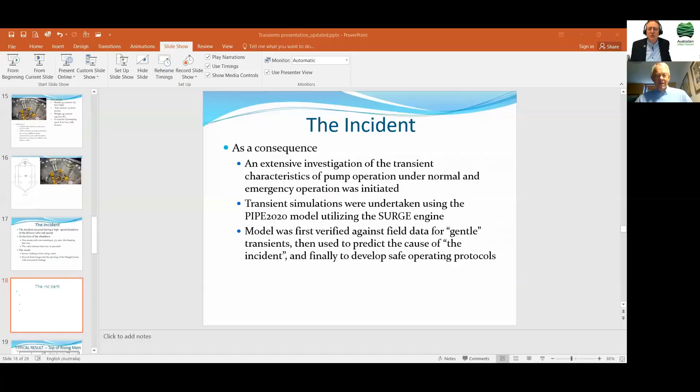All yours. Okay, are your pumps about to fail? Now, my own interest in this topic goes back perhaps 25 or nearly 30 years. I got involved in a couple of pump stations that had been built. Then during operation, they showed some rather unfortunate tendencies with large bangs and occasional bit of leakage and so on. There was not a lot known at the time about what was causing this, so I had a look at it, and that's why I started, and it's continued to this day.

I do spend quite a lot of my time working with supply networks, sewer networks, pumps, valves, and so on, and the effect of changes in the network. We'll see what I mean by that a little later on, what that can do: the pressure waves running around through the system.

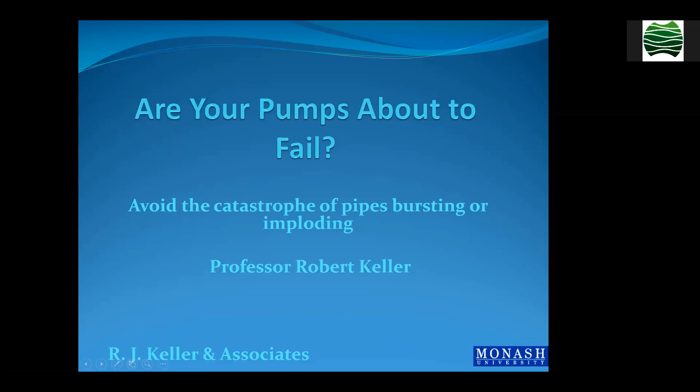Pressure waves, transient phenomena in pipelines, we often refer to this as water hammer. Water hammer is something that we perhaps have all experienced without knowing it. The solenoid valves in our washing machines and dishwashers, for example, are designed to operate very, very rapidly. Occasionally, a solenoid valve will close and you'll hear a bang in the wall. That's water hammer, that's a pressure wave which is bouncing around in the pipe, consequent to the closure of the valve. If you're really unlucky, you'll see a water stain in the wall. The pipe behind it has burst, and that can be a major issue.

We normally think of water hammer as being associated with transient, very high pressures, and these can range from small scale. The picture on your screen now is an HDPE pipe, about 400 millimeter diameter, where a pressure wave simply caused a leak at a joint in the pipe.

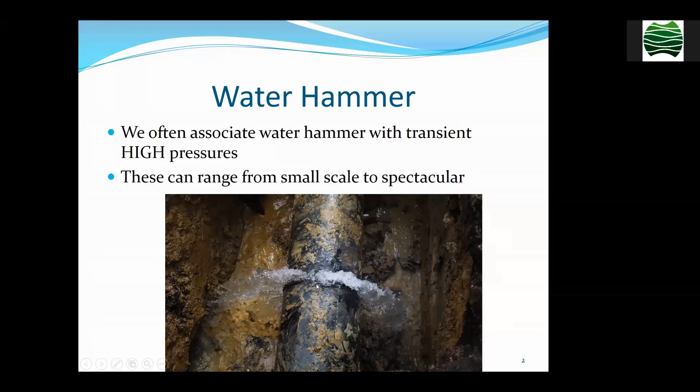Or they can be large and spectacular. You can see a burst water main there, with the consequent water spout from the high pressure behind it once the initial very high range has gone through. The other picture is of a 700 millimeter cast iron pipe, which was totally torn apart by a pressure wave going through it, partly due to the condition of the pipe, which, as you can see, is not very good.

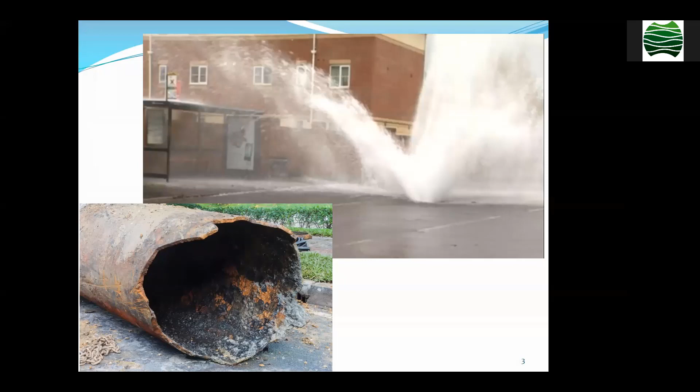But what's often forgotten or not realised is that transient low pressures can be equally as catastrophic. What we're looking at here are a couple of irrigation pipelines, often designed and constructed using non-pressurized pipe on the assumption that, lying on or near the surface, the static pressures they need to withstand are quite low. But of course the operation of a valve can drop that pressure very rapidly, and here you see a couple of cases of irrigation pipes that have been imploded, split through implosion.

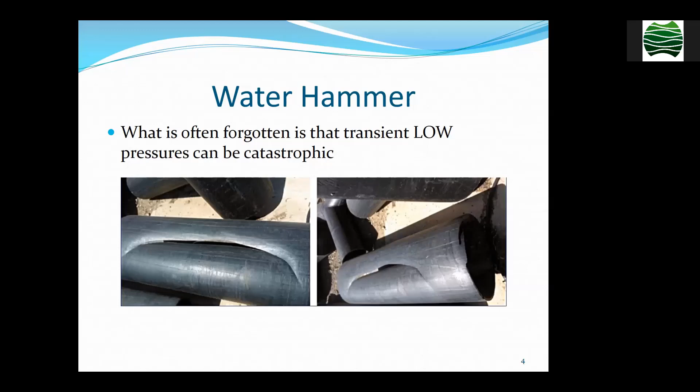So what causes water hammer? Water hammer occurs in a closed conduit when it's flowing full, and it occurs when there's either a reduction or an increase in the flow, with a consequent reduction or increase in the velocity of flow within the pipe.

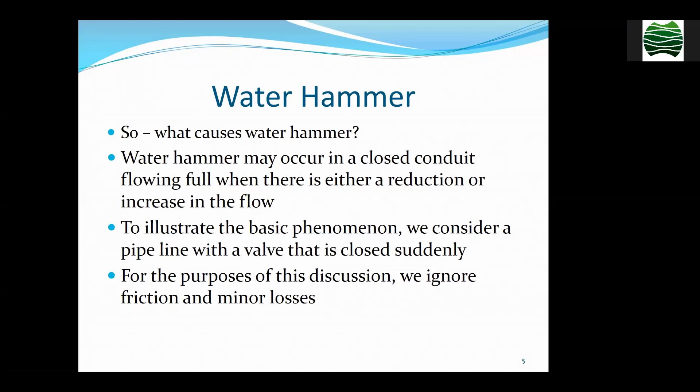Let's illustrate the basic phenomenon very simply. Think of a pipeline with a valve that is closed suddenly - and forgive me, as an aging academic I can be a bit pedantic about these things, we're going to ignore friction and minor losses, they're irrelevant to the current conversation. Let's say we have a straight pipe with a valve in the middle of it, an initial velocity right through the pipe of V0, and then very rapidly we slam the valve shut.

What happens when we slam the valve shut is that on the upstream side, we still have water entering the pipe at the upstream end, but the water adjacent to the valve comes to rest, and is brought progressively to rest as a pressure wave progresses upstream. We would expect that the water in here is compressed, because you've got water coming in at the upstream end while it's stationary here, and that's what gives rise to this high pressure wave.

On the downstream side, the phenomenon is the opposite. Here we have zero flow coming through the valve, whereas downstream we still have flow passing out of the pipe. As a consequence, we get a negative pressure wave, and the pressure can drop very quickly and move downstream. What you can see there is the very strong negative pressure wave on the downstream side of the valve.

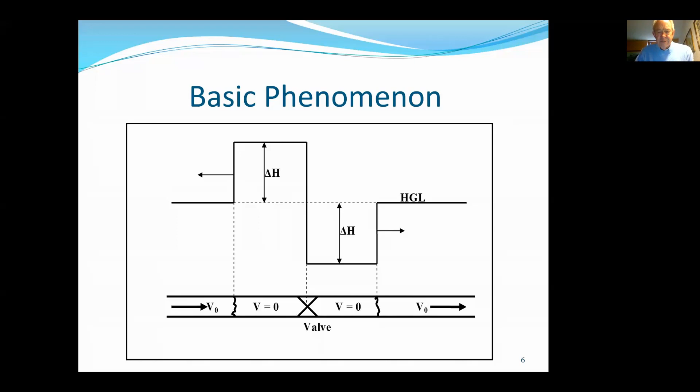In many ways, because we associate water hammer with positive pressure waves, and we often think that we're dealing with those, I do want to emphasize the fact that these negative pressure waves, as we'll see, can cause very significant problems.

Now, the compression and expansion bring the water eventually to rest, and we get these large pressure waves that bounce around the system, positive on the upstream side, negative on the downstream side. These pressure waves travel at the speed of sound. For water in a steel pipe, that's around 1,200 meters per second. In plastic pipe, it can be as low as about 350 meters per second, to 400 or 500 meters per second.

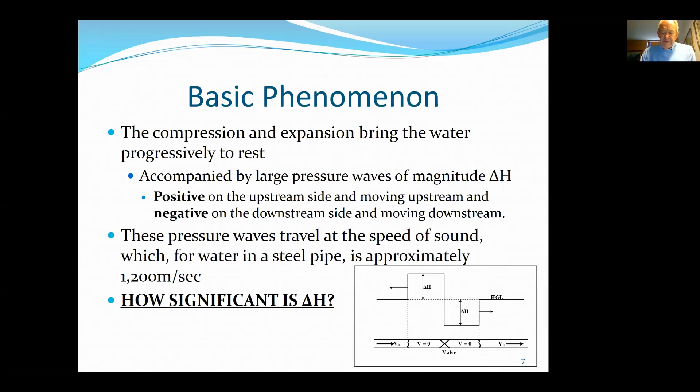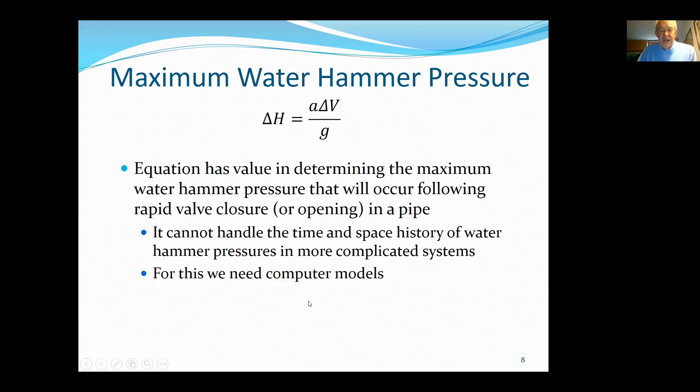This equation does help us determine the maximum water hammer pressure that may occur, but it can't handle the time and space history of water hammer pressures. It can't tell us how to reduce the water hammer by making use of mitigation techniques, and for this we need computer models, which I'll say more about later.

Let's think of the order of magnitudes we're talking about. If we have a velocity of sound in water of about 1200 meters per second, a change in velocity of about 2 meters per second—say from 2 down to 0, or from 4 down to 2—and a gravity of about 9.8 meters per second squared, then delta H is around 250 meters of head. That's a very high pressure head.

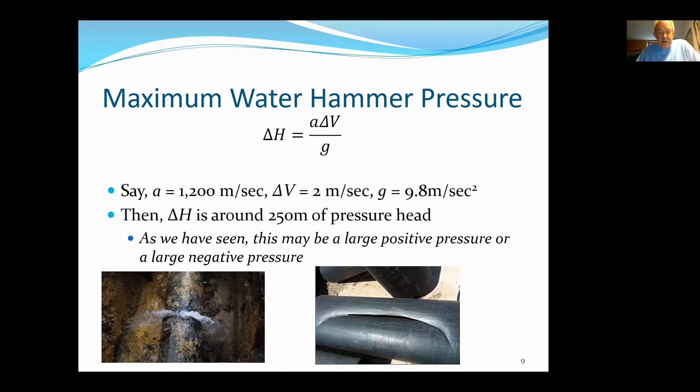At the very least, we need to know that something like that is possible within the system I've talked about, and we need to think about the implications. A very large positive pressure can cause this kind of issue. A very large negative pressure, or even a relatively small negative pressure, can give you this kind of issue with an implosion.

Water hammer can result from any change from steady state flow occurring through a change in boundary conditions—whether this is changes in valve settings, starting or stopping of pumps, or pump trip. There are a number of other ways it can happen, but these are the most common ones.

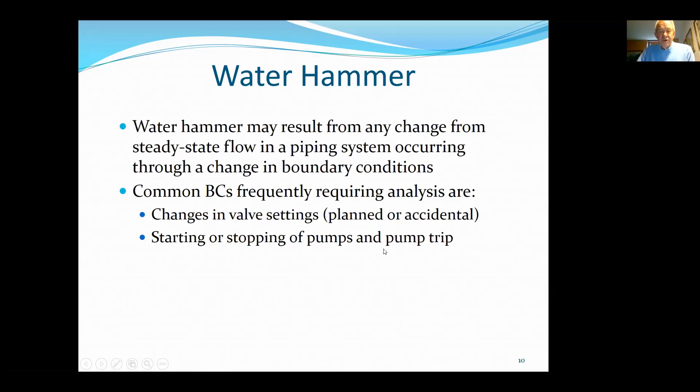As I've said, it's normal to think of pipe failure due to water hammer as being due to excessively high pressures, but in fact there's a mechanism for pipe failure from pressures that are less than the fluid vapor pressure—that's the phenomenon of column separation.

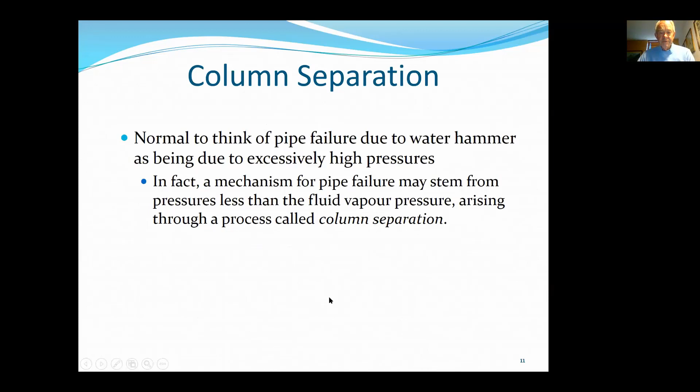Common liquids can't stand that, so you actually reach the vapor pressure of the water very, very quickly. Significant cavities form at very low pressure, and as those cavities move through the system into a region of high pressure, they implode—not explode, they implode. They fall in on each other with the release of a tremendous amount of pressure in the process.

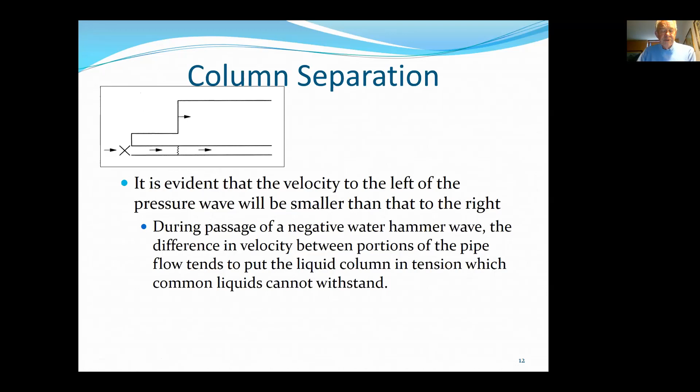The separation, the column bubble as it were, then reattaches and settles down, but with that enormous pressure wave associated with it.

So I've mentioned that already—flow reversal will close the cavity. We won't talk about the entire process, but where we get very low pressures forming through column separation, we know we're going to get potentially damaging very high pressures as well.

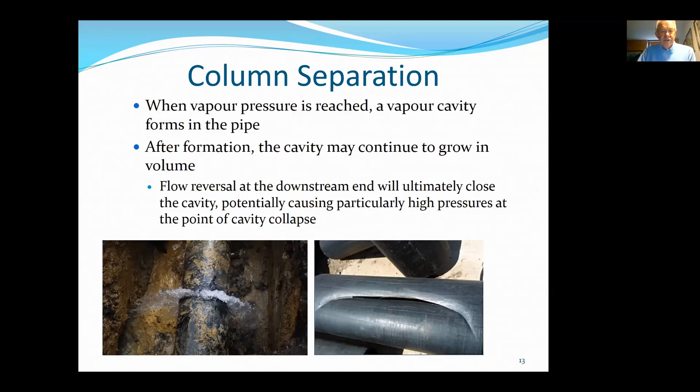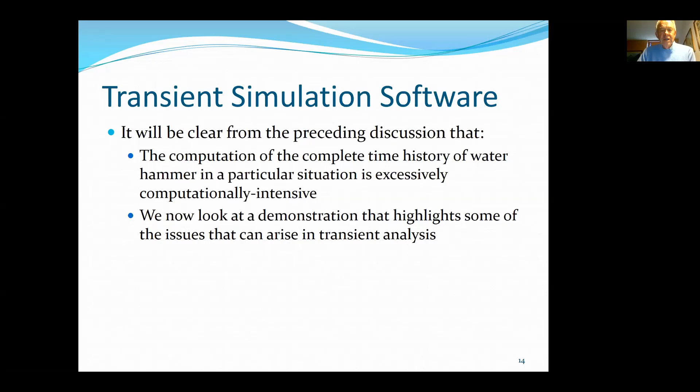It's clear from this discussion that computation of the time history is excessively computationally intensive—we're talking about very short time increments as the process is happening. Now we're going to look at a brief demonstration highlighting some of the issues that can arise in transient analysis. It's just a demonstration, not solutions, but a picture of what might happen.

We're going to do this in relation to a very large pumping station. It has 4 large pumps, each of which stands 4.5 meters high and 4 meters across, each weighing 45 tons, each capable of pumping up to 8 cubic meters of sewage per second.

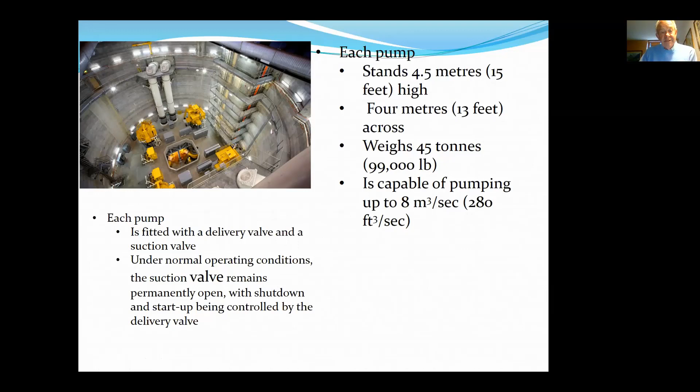Each pump is fitted with a delivery valve and a suction valve. Under normal operating conditions, the suction valve remains permanently open, and shutdown and startup are controlled by a single delivery valve located on the discharge side of the pump itself.

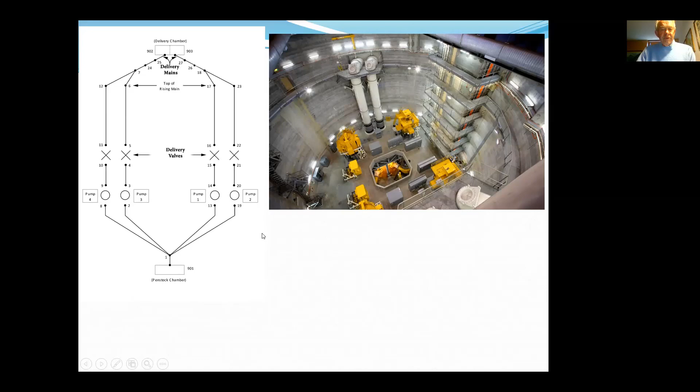So what we're looking at here is a schematic of the system. There is a large wet well where the pumps draw water from. Each pump passes water up through one of the delivery lines, through the delivery valves, and the rising main—quite a long rising main, on the order of 80 meters long—leads to a delivery chamber.

During the commissioning of this particular pump station, with just a single pump running, there was an incident that occurred—and I call it an incident, but it was pretty frightening for the people who were there at the time.

One pump only was running at 8 meters cubed per second, operating with a valve closure time of 6.2 seconds. The outcome: as the valve closed, there was a colossal shaking of the rising main, several loud bangs, the flange joints opened with associated leakage, and the pump jumped. It was all pretty unpleasant.

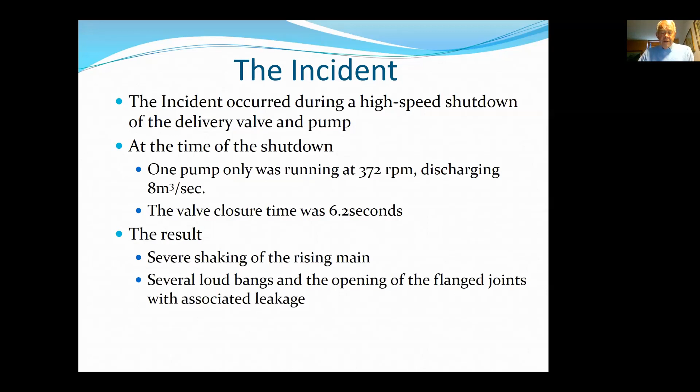So the requirement was really to have a look at it, find out what had happened, and then as a consequence, look at retrofitting or changing the protocols of operation in order to remove these transient effects.

So I undertook a transient simulation using a model called the Surge Engine, which goes with the Pipe 2020 model. This is an analysis model that comes from KY Pipe in the United States.

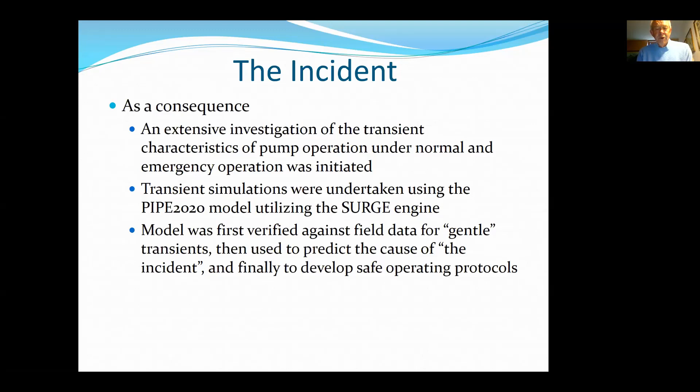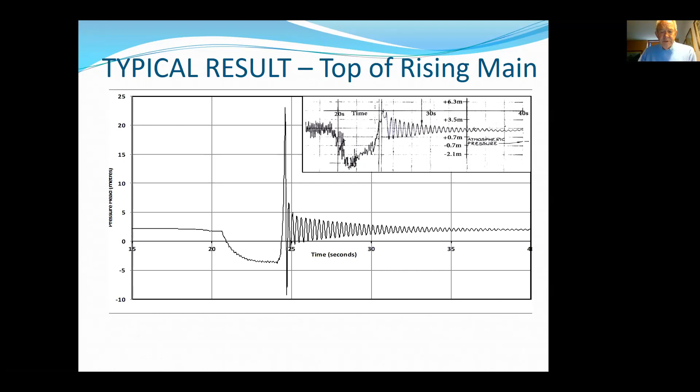That verification process produced a number of comparisons, one of which we see here at the top of the rising main. The small inset is the data picked up from the system itself during that controlled transient, and this is the predicted transient, and you can see they're virtually identical. So we were quite happy about that. This sort of process is very good when you can do it, because it gives you confidence in the subsequent predictions and studies that you carry out.

Now I'm putting this one in to make a point. This is the steady state operation of the pump immediately prior to the incident. The blue line is the pipe itself over a distance of 180 meters from the wet well at the upstream end to the discharge chamber at the downstream end. The pump is located here and the valve just here. The red line is the hydraulic grade line. Very little resistance in the lines, so these lines here are virtually horizontal, but then the climb, of course, is the energy added to the system across the pump itself.

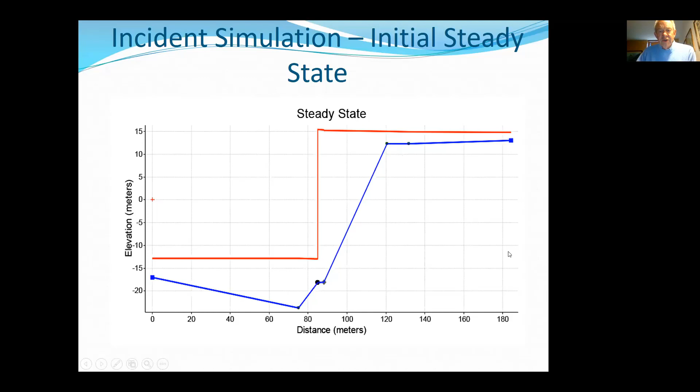The important point to note here is the relatively very low static pressure in the long length of rising main. We're looking at 60 meters there, and in fact this line should be vertical, so there are about 100 meters of pipe within which the steady state static pressure is only 3, maybe 4, or up to 5 meters. So it doesn't take much of a negative pressure wave to drop it to absolute zero within that line.

So the transient simulation of the incident involved running the model with the valve closing linearly in 6.2 seconds, with the pump running throughout. I'm going to do a little trick now: change my screen view and bring this picture up. I've got the simulation model running in the background, and I didn't want to take the time to switch to it fully and run the model right through to see different aspects. We can do that later on if there's time.

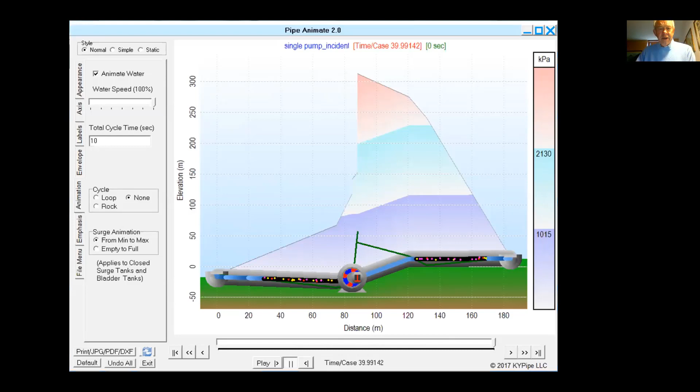So now I'm going to go back to where we were. This is where we left the presentation. What actually happened: virtually the whole length of the rising main and the delivery main, about 96 meters of pipe, was subjected to column separation.

And this happened because the initial steady state up here was only around 3 meters or less. So it really took very little change in velocity to suck that pressure right down to zero.

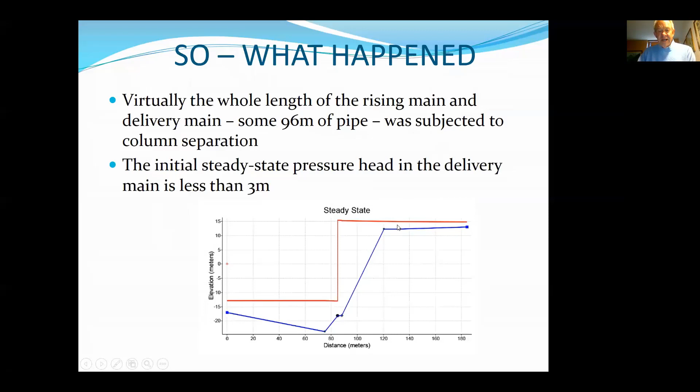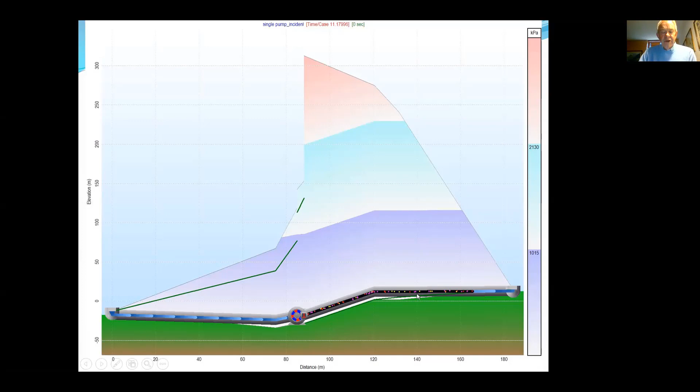We saw this earlier, but I've put this into the presentation to emphasize the point again: when you get this kind of column separation occurring, and associated with it these very high pressures when these cavities implode, you've really got a highly transient, potentially very dangerous situation.

So what this investigation showed us was that the cause of the incident was column separation in the rising main, and the system was especially vulnerable to such problems because of the low positive steady state pressure in the long horizontal delivery main.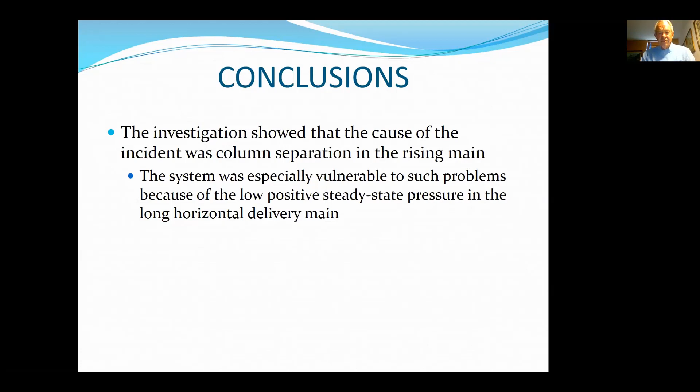So the high pressures, but now I want to emphasize the low pressures again. As I said, these are irrigation pipelines. Irrigation pipelines, because they're near the surface, are often designed with non-pressure rated or very low pressure rated pipe because it's considered that the steady state pressures are going to be very low.

But of course under steady state, no problem. The problems arise when those lines are operated - simply by changing a valve, changing a pump, you can get these extremely low negative pressures occurring, with the subsequent damage that we've seen.

So I'm going to leave it at that for now. That completes what I wanted to say. I've got a couple of other slides there in case there's time to look at those, or we can look at the simulation as well if need be. Let me stop there, come back to you, Trevor.

Well, thanks, Bob. That is really - you can see you've been doing this for quite some time. This is fulsome, a large amount of experience and knowledge goes into this work. But there's not a comment or question on the board. You must have answered all their questions. That's what I - or as you say, stun them into silence. I kept the maths out, so I wouldn't stun too many people. No, well done, well done.

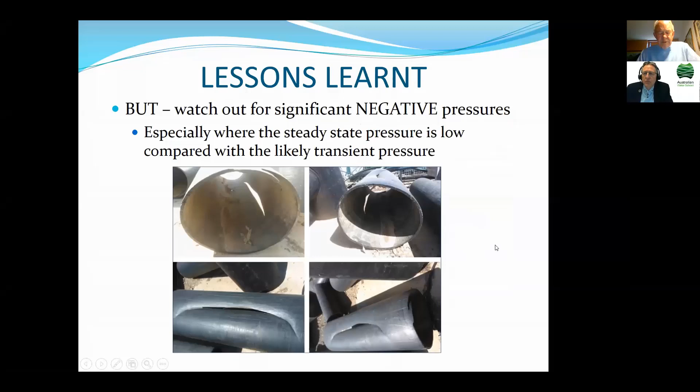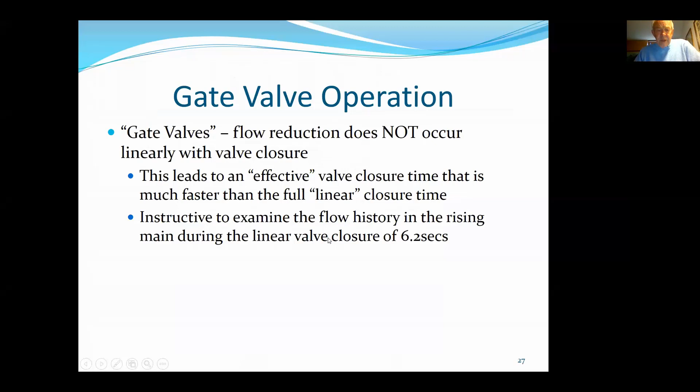Well, what I was saying about gate valves is - this is one thing we discovered with this particular structure we've just been talking about. The discharge valves are gate valves, and the thing about a gate valve is that it has an effective valve closure time that's very much faster than what you would expect from a full linear closure time. So it's instructive to have a look at the flow history in the rising main of this pumping station during a linear valve closure of 6.2 seconds, and we're looking at that here.

Now, the first 5 seconds are not part of it because that's steady state operation anyway, but the valve started to close after an elapsed time of 5 seconds. Then you can see for the next 5 seconds, which takes you down to almost 90% closed, there's virtually no change in the flow rate.

This is a characteristic of gate valves well worth keeping in mind: all the action happens in the last second or two of closure of the valve. Without going into full details, the change in operation protocols adopted for these valves involves a very rapid initial closure and then very slow closure over the last part. That makes a significant difference.

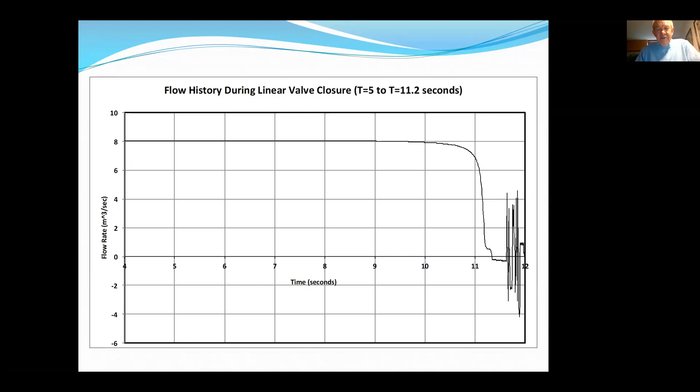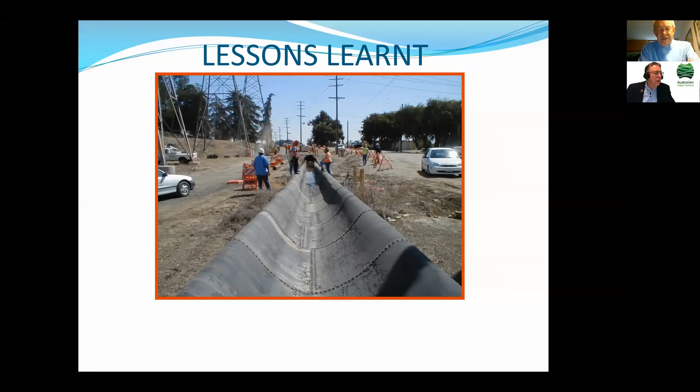Harry has asked, was the 300 meter transient due to the flow reversal? Yep, that's exactly right. What happened there is that when all the water comes to rest, it starts to run backwards through the pump. A check valve closes very quickly to protect the pump from reverse flow, and when that happens you get that very high spike in pressure.

Charles in Queensland has asked, could we have a quick run through the parameters that impact on the surge pressure amplitude? Was that too much? Okay, the surge pressure amplitude, well the principal ones - I'm just going to, the wave speed is a critical one. If you think of it, I could go back to that slide perhaps... no, I'll leave it. It's that simple Joukowsky equation.

The speed of sound in water is a critical one. The higher that is, the higher the pressure wave you'll get, the value of the pressure wave. So in steel, although steel's good and strong and should stand the high pressures, you get the higher wave amplitude. The actual pressure wave has a much higher amplitude in a steel pipe than in a corresponding plastic pipe. The speed of sound is also governed by the fixation of the pipe, whether it's free to expand or contract at its ends, or whether it's fixed in place. These tend to be more secondary effects, but they are there. So the main things that affect the magnitude of the pressure wave are the speed of sound in water and the rate at which you change the velocity.